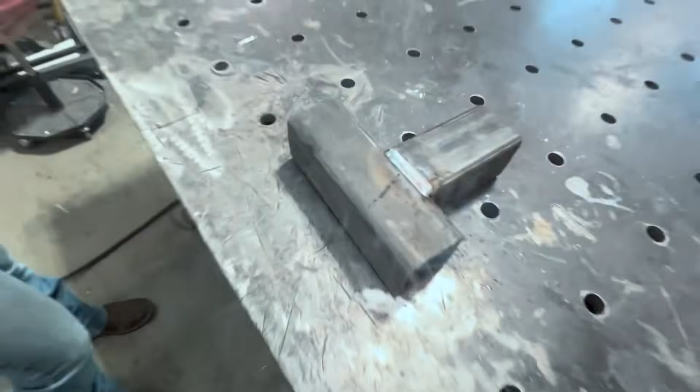Ooh, that's a good fucking weld right there. That's pretty. That is pretty.

Happy Mother's Day to those of you who are sitting on the sofa while your wife is out having brunch or lunch with your kids, getting her nails done, going to a yoga class, you know, all the typical mom stuff.

So this is our Mom and Me Day, and this is my daughter Christine, and she's a welder. Well, I'm a fabricator. No offense to the welders out there, but I'm kind of better - not at welding, but just sticking shit together. Accuracy is my big thing.

She asked me what I wanted to do for Mother's Day, and I said I wanted you to teach me how to weld. Because JF is very eloquent with me - you guys have seen him on camera. Well, I cut all the bad stuff out when I'm in tears. But tears when he yells at me.

You suck at listening. I do, true story. Well, I mean, I feel like I'll give you better analogies. You always get it if there's a good analogy. Yes, you got to compare it to something you can understand.

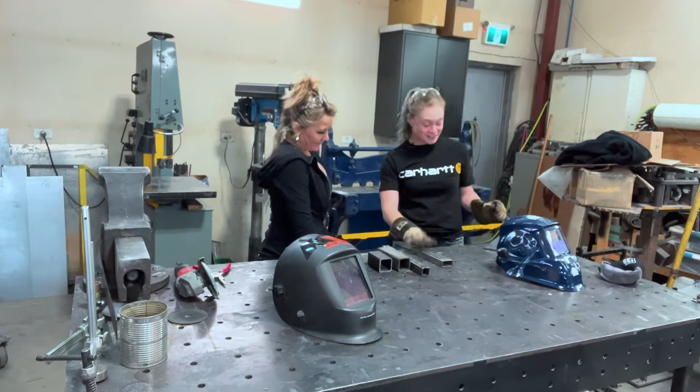What are you going to teach me first? Well, I was going through your scraps. Okay, and steel - just plain steel, stainless, aluminum. That's kind of the basic three. So this is steel, stainless, and aluminum. Yes. Okay, what's this? That's also steel, it's just a fun shape.

So I think there's something I can make with this. If we just add the fourth piece and make like a little 3D diamond, I don't know, something more fun than just a basic shape. Sure, I mean this is what I did when I first started welding - it was just shit like that, and then you get all sorts of different things, and my boss was like, cut it on an angle, stick it together weirdly, and just challenge yourself. If you want to learn, you just put it up like that and try to figure out how you have to weld a gap in something.

I mean, I work with a lot heavier steel than the welders that you guys have, so it does make a big difference. Like I've got goggles, I've got gloves, I've got a welding helmet. Halfway there, I'm safety first. It's more than JF ever does - safety squinting is his forte.

First things first, I'll turn the welders on. Okay, let's talk about welders. We're waiting for our sponsor, by the way. We have Lincoln Welders and we have a Miller welder, and so we're not privy to either right at this moment.

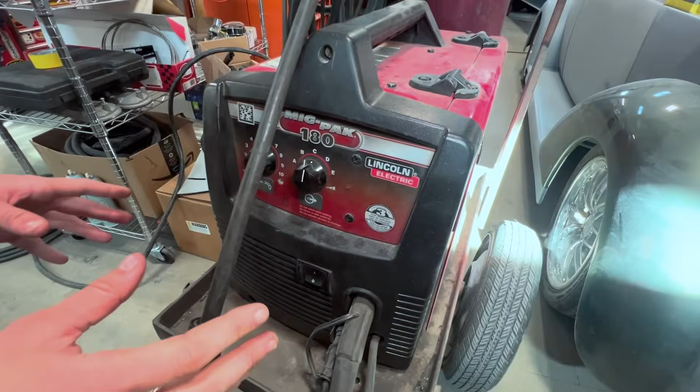Now this is a small welder, and it's a hardwire machine - you're running hardwire. But welding is really just until it feels good, until you lay a weld and you go, yeah, I like that, and then you just stay there.

It's not rocket science. Yeah, because I know JF often, this is where he'll have it set - he'll have it set sometimes on B and sometimes on 5. So is this the heat? That would, what do we got? Yes it is, actually, for this one. Sorry, they're all different. So it's a matter of knowing this is wire speed, and then you've got a turtle and a rabbit.

And then it shows the wire going through the rollers out the tip of the torch. Okay, and that's V for volts.

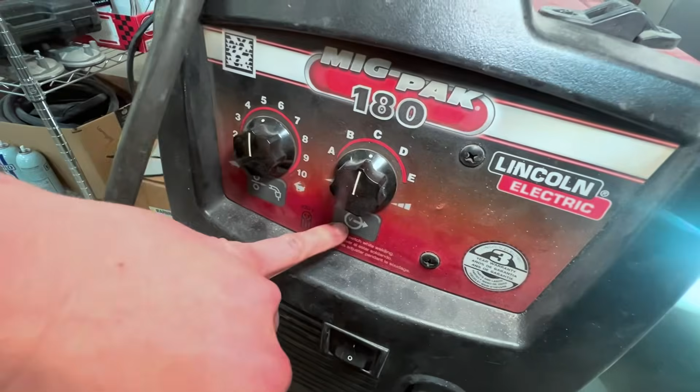So heat is A to E, and speed is 1 to 10. This one will have an actual volt and amp reading. This is super important because it has to touch the metal, because it grounds to it. So think of another metal, like a car battery, you've got your positive and negative terminal.

You think of a car battery, you've got your positive and negative terminal. This is your positive terminal, and that's your negative terminal. Makes sense. There are no stupid questions.

What if you don't have this on, like what if this is just on the floor? Well, take it off the table. Nothing, nada. Okay, so that makes sense.

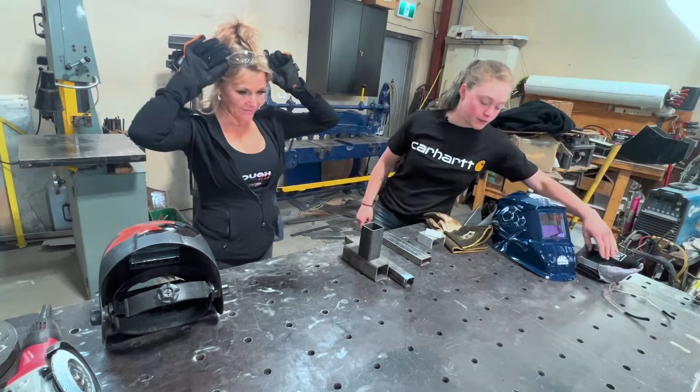Well, let's get welding. All right, you want to weld? Welding helmet, with safety glasses. Okay, JF's got a bigger head than me. So when it's on your head, push and then twist.

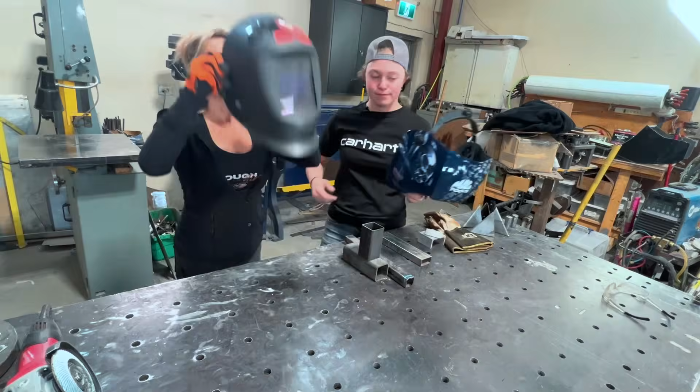Invited Rachel. We should have invited Rachel. This would have been really fun.

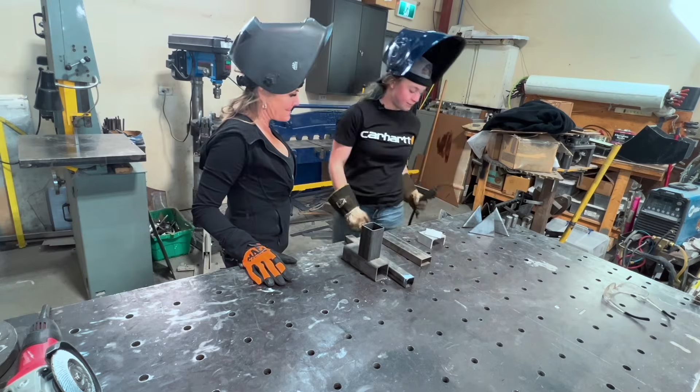Before I blind myself, make sure I'm not in grind mode. Okay. Why am I doing this? I'm supposed to be -- no, I want you to do a weld first. Don't freak me out.

Check them up. We actually do call these guns at work. It's just a gun. It is a gun. Okay, cool.

Can you see okay? May the 4th be with you. Oh wait a minute, what happened? It just went black. Yeah, the lights are kind of bright in here. So it's actually turning the helmets on because they're auto darkening. It'll make sense, just stare at that and then you'll see.

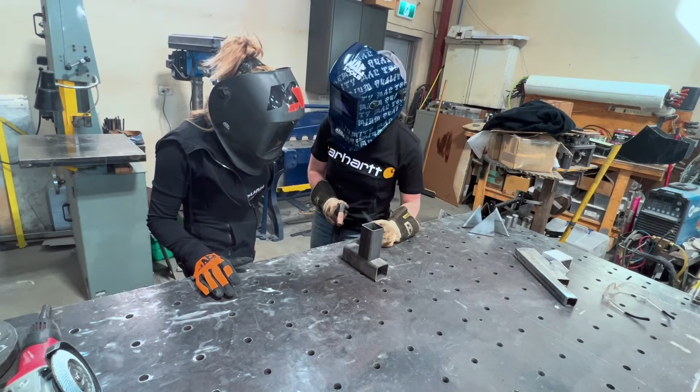Did you see that? Yeah. I gotta go lefty here. She's a little cold. Is that why it pools like that? Makes it a big blob?

Yes and no. I was trying to get it to fill in quite a bit, but you see how it looks like you can stick your fingernail under each edge? You gotta know how to weld badly before you can actually weld nicely. That's the fun part, because you have to know what a bad weld looks like. So is that a bad weld? It's not a good weld. I mean, it's not gonna go anywhere.

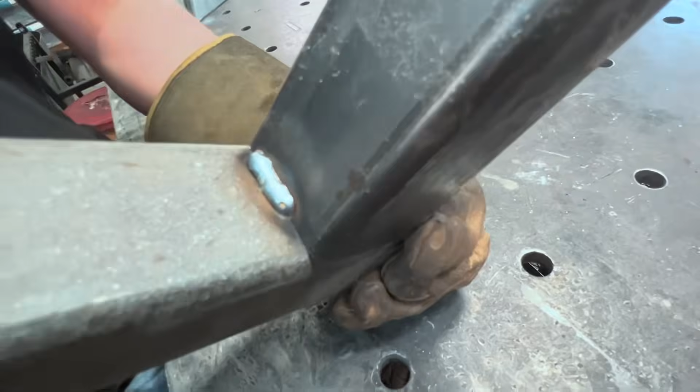But it looks like you could probably grab it almost. Yeah, like it doesn't really look like it's flush with the metal. No, it should be a lot more dipped in, concave. So is that because it's not hot enough? Yeah, okay, that's a cold edge.

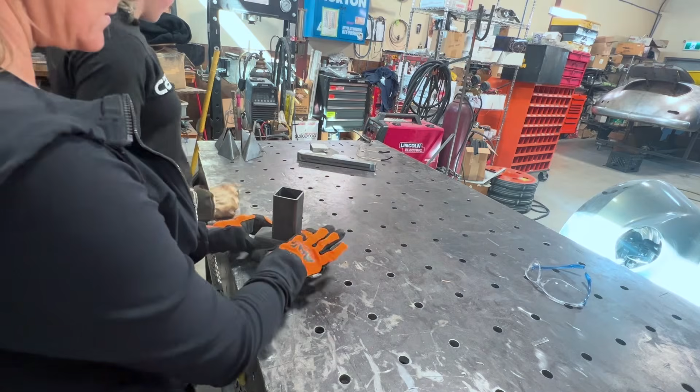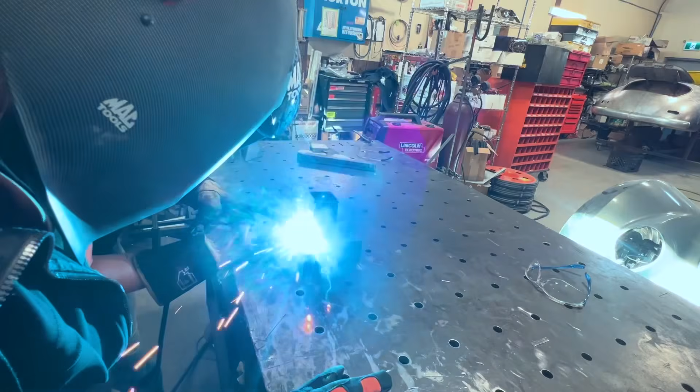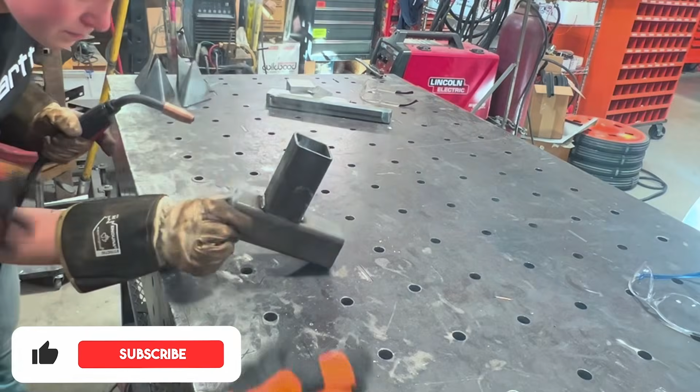Yeah, that's a little better. A little better, not great. Still got a cold edge on the bottom, but it's much better on top. Well, it's pretty nice, a couple little dimes there.

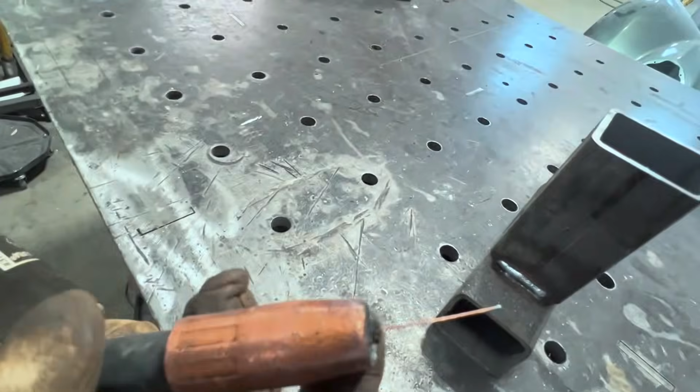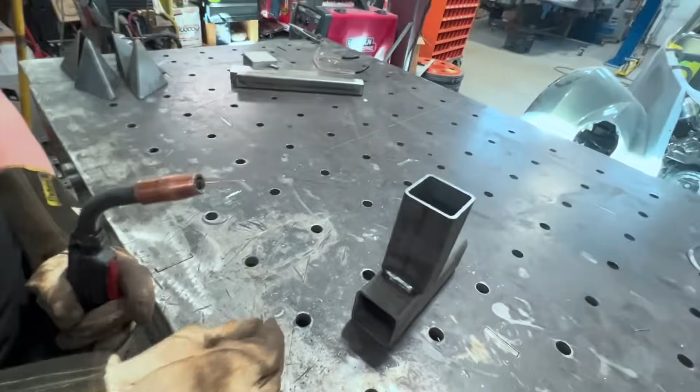So what I was noticing what you're doing -- is it like you do a little circle, circle, circle? Yeah, circle, especially with hardwire, which if the camera will focus on it, you can see how it's coppery looking, the wire. That's hardwire, so it's 100% metal. Whereas the wire that I would use at work is filled with a bunch of little powder and chunks of metal. Oh okay. So it's called metal core, but it's actually hollow on the inside.

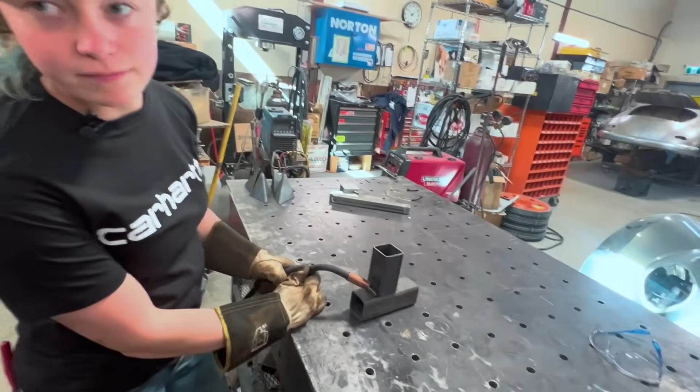We use a different gas as well, and it's a lot bigger than that wire. So when I'm using hardwire, I do little circles, kind of like if you've ever seen guys stick weld, they do the same thing, but with MIG you want to push the puddle, and with stick you want to drag the puddle. So anything wire fed, you push the puddle.

And with stick, you know how there's that coating around the electrodes? That's called flux, and what it creates is slag. So you see guys chipping their weld after it's done, that's the slag. So if there's slag, you drag, and otherwise you push the puddle because it works a lot better. I'm trying to do this almost backwards so you can see a little better. There's a little bit of a gap there, so we'll see how it happens. Gaps happen, gaps happen.

Woo! There it is. That's a good fucking weld right there. That's pretty. You did it. Wow, I get paid to do this. It's fucking awesome.

Sorry, my daughter swears a lot. I work with 50-year-old men all day.

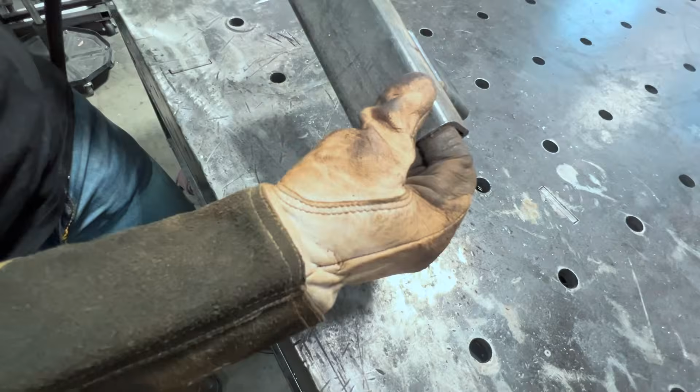And that's pretty flat as well, pretty much spot on as it should be. So there was no circular movement? No, just going forwards and back and forth, over-exaggerated, because I wanted to bring the material from this piece into the weld, and do the same with this one. I wanted to fuse the metals together, right? You're adding a little filler material, but you want both pieces to merge. You want two to become one. Gotcha. It's just I glue the metal.

Okay, your turn. Oh God. That's it, that's all you get. I literally can't show you any better. You just have to try. There is no do, only try. Or no, there is no try, only do. Only the Sith deal in absolutes.

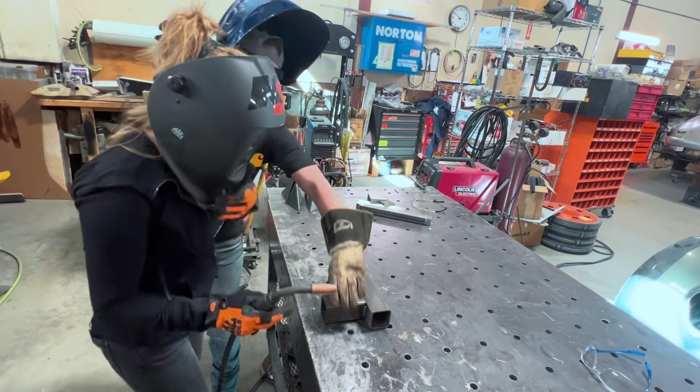Okay, whoa, stop. You see how much this is out? Oh, that's not good. You press the button. So what button am I supposed to press? The big red one. But don't do that until you're ready to actually weld.

And do I go this way or do I go this way? That's my question. Well, look at the angle of your head. If you're angling this way, you want to push it. Because you're holding it in your right hand, it's going to be easier for you to do it this way. Do you want to move over there a little bit more? So where are you starting at? If you're going that way, yeah, right? That makes more sense to me, going this way.

Okay, oh gee, I don't have my helmet on, woman. Flashbang. Okay, it's stuck. Yes, just hit the button again.

Holy fuck, where the fuck are you going? This is throwing everywhere. Okay, it scared me. I noticed. Okay, but that wasn't bad, it went into there. The welder's set really nicely for this material now too. But let me finish that, even though there's that little block there.

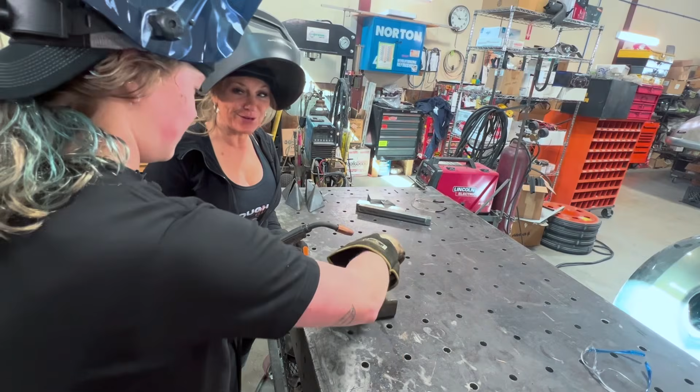How many hands are you using? One. Use two. Why are you using one? I don't know. Make a tripod out of yourself. One, two, three, right? Like you can lean on this, not as much, but our nozzles are like this big around. Some of my gloves, because they're so hot, they're like constant Lego hands from grabbing nozzles. But usually on big pieces like this... you know my mind, as soon as you said Lego, I was like, everything is awesome.

But you can literally just rest this on the bottom piece. That's what I normally do for welds like this one. As this one goes along, I'm resting on this material. I was a little nervous, I gotta say. The only thing that's ever in my hand when welding's going on is the camera. That's fair. Well, we can change that.

Okay, so let's try this again. Right hand, have one of your hands like here. This can get warm after a while, but if you have your hands like this, you have way more stability. Okay. Eyes. Okay, yep.

I have no idea if I did anything, you're kind of blind in there, aren't you? Totally blind. You were following the edge of this material. Did not, I didn't even. You barely touched this. It's hard to see, and it's really hard to explain.

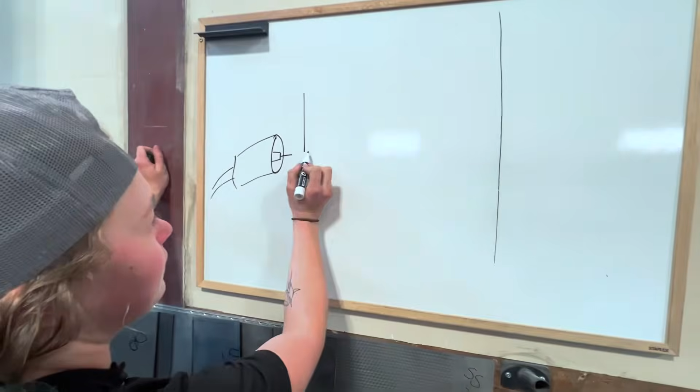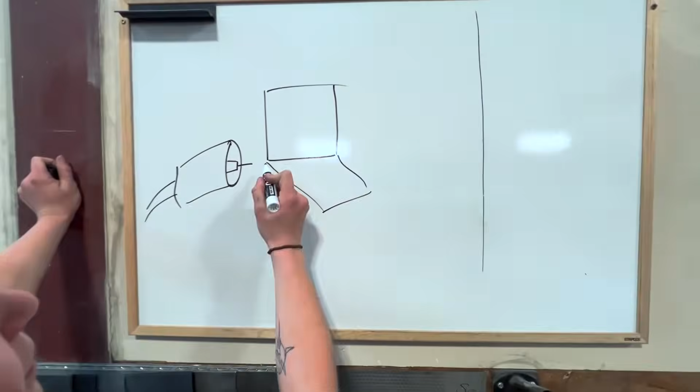So here's your wire, right? This is your little welder, that's what you're holding. And then you've got your piece of material. You're gonna be welding in this corner, right? What you're gonna see is basically a shape come out like this - that's the arc. And then all of a sudden your puddle is gonna be here.

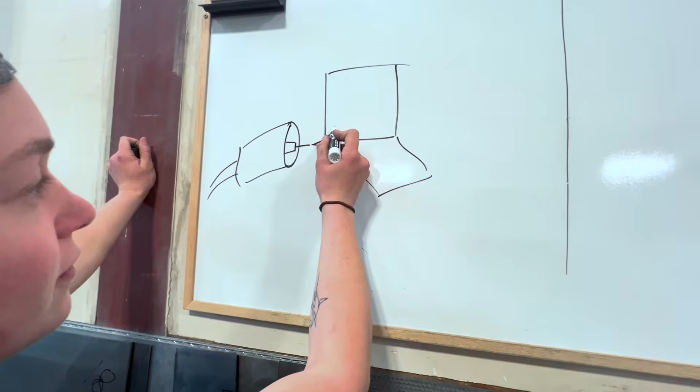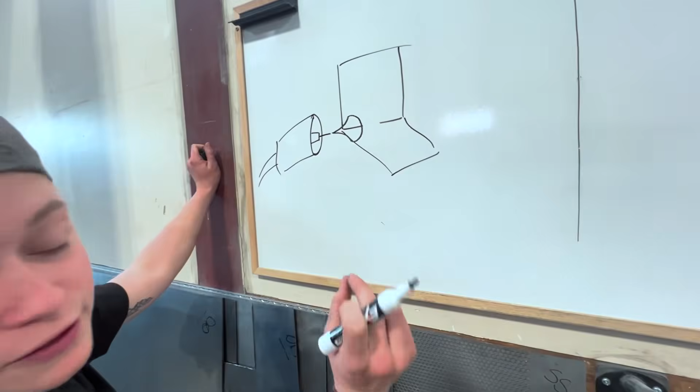For me, I didn't see anything puddling, and that's because you were going too fast. That's why your weld was small, whereas my weld was that big.

I was in a hurry. I'm always in a hurry. Okay, you don't need to be. So this is going to be your arc that comes down, you'll have a puddle forming, and then what you're also going to see is almost a little triangle like that.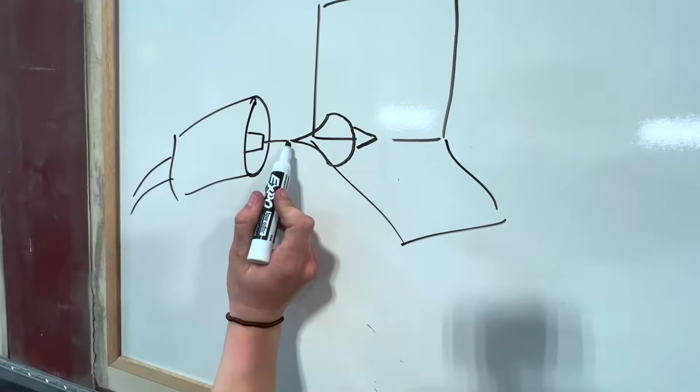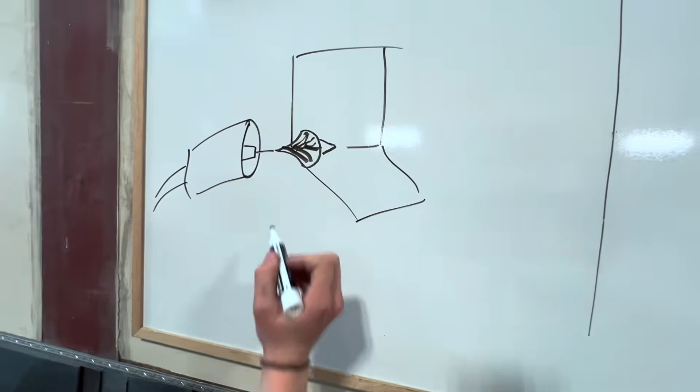Anyway, that's your wire that's coming out, and then it goes out, and it's gonna blah blah blah, and then it puddles. And after the puddle, you'll see this little bit of gas. He's very excited, he's so excited right now, he's prematurely excited.

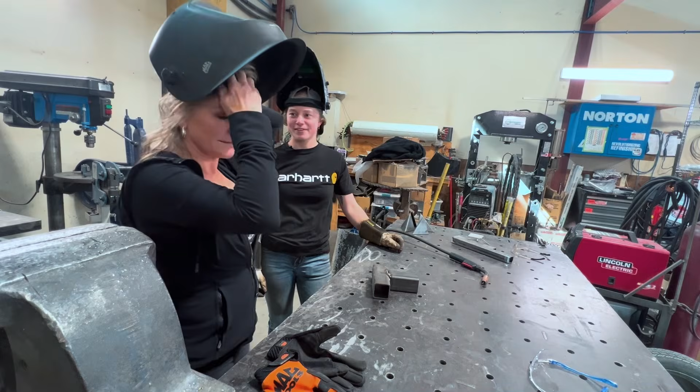It's a smiley face. Do you have a hair tie you could just ponytail it with? You good there, Fabio? My child likes to mock me a lot. I am my target audience - if it's funny to me, that's all I need. That's it, you're your own audience? I am my own target audience.

We're gonna give you a long surface to use.

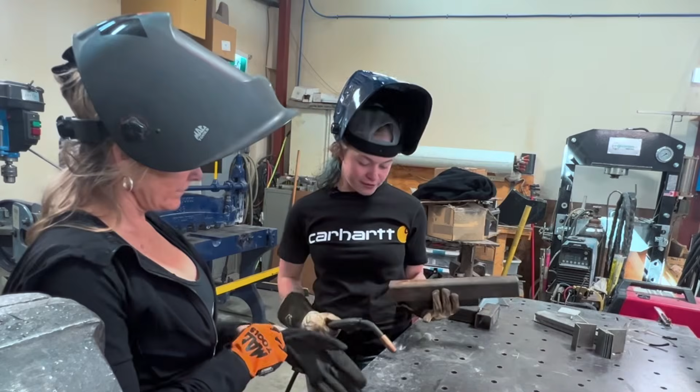Why does it stick to the... so see that? That's where it's sticking. That's what happens when your surface isn't clean a lot of times, so you can see it there. As you weld, there's all those little bits of spatter that come off that burn you on the arm. That doesn't feel so good anywhere. Those little pieces, if they're on the table and get underneath the piece, they arc out, that's what it's called, and that's why it sticks, because they kind of just explode basically.

Okay, so I'm going to go from this side and push it along. So just before I do anything - oh, that's what those are for, this is a fab table. Yeah, I know this is a fab table because I know Gary works on it all the time.

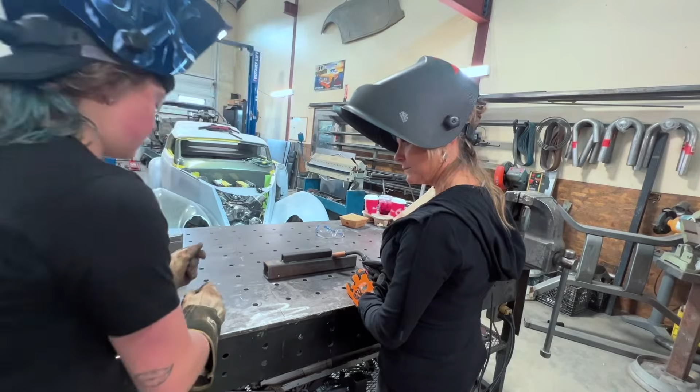So I just go like this, and there's no rush - I'm just practicing. You gotta try, it's so hard because I'll be able to see a little bit better from this side now. I think that'll be okay. I'll be able to watch and can even just say slow down, speed up, whatever, because I'll be able to see the puddle better than you can, since you still don't know what you're looking for.

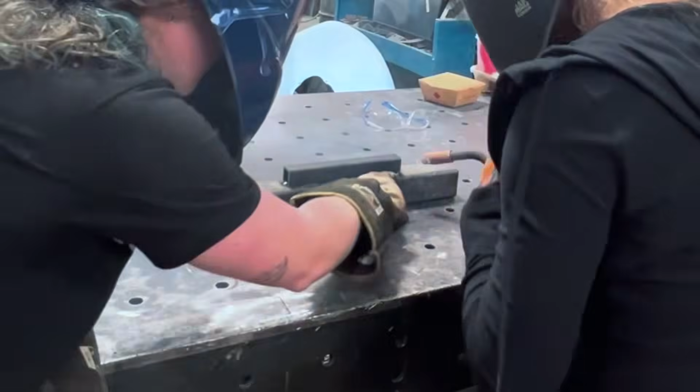So you're too low again. Pardon? You're not in the corner. Ah, okay, you see that? That metal should be directly in that corner. That's where you want to be.

That distance, don't keep pushing in. If it helps, you should be able to feel how you're resting the bottom of the nozzle on this corner. You can just stay there and rest it the whole way along. If you want to move it a little bit, you can still manipulate the direction a little bit, like that.

Everybody, find what you like. Not everybody does the same thing. I never weld the same way, ever. Sometimes I do a big whip where I go forwards and then come back, two steps forward, one step back, you know, like the song. Sometimes I go like this and work my way across. Sometimes I just do dimes. Sometimes I go like this. It just depends, depends how I'm feeling.

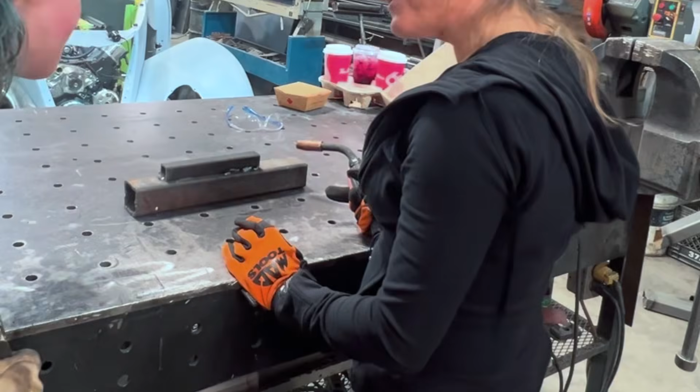I don't know, I can't see anything. That looks horrible. Didn't know there were birds in here. It does look like bird poop, it's awful.

I'll come from this side. Maybe I need to go this way because I could do it left-handed. Well, it's important to be able to do both when you actually do this as a job. Maybe going this way just doesn't work for you. Maybe you can go in this hand and go that way still. It's dealer's choice, but I need to be able to see.

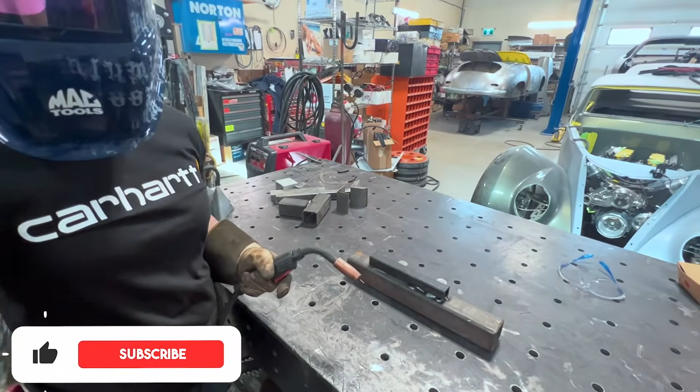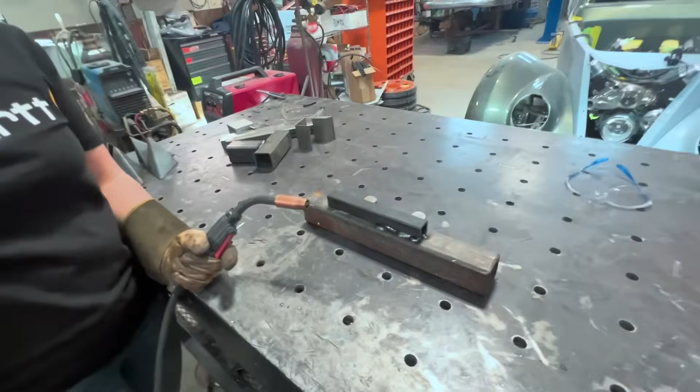Maybe if you zoom in through the camera, I don't know. I'm trying to figure out a way that I can show you what you should be looking for. It's so hard. Okay, you should have your helmet on for this though.

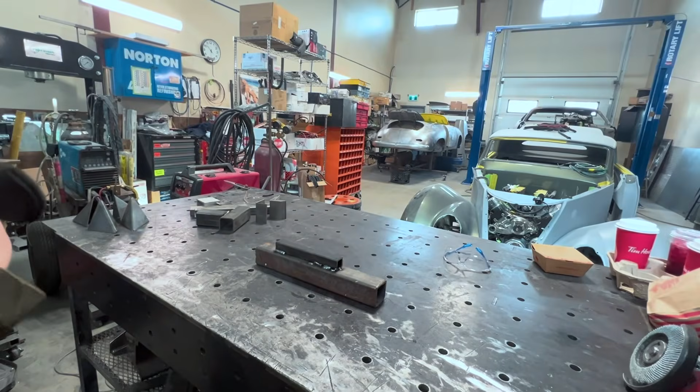One thing I just learned that I was doing wrong was I was trying to keep my face on this side of it, and I actually wasn't even seeing. You need to, yeah, that's why you weren't seeing. My face was on this side of the thing so I could see what you were doing, which I wasn't before. You have to be able to look at it, it's very, very important. So that was helpful.

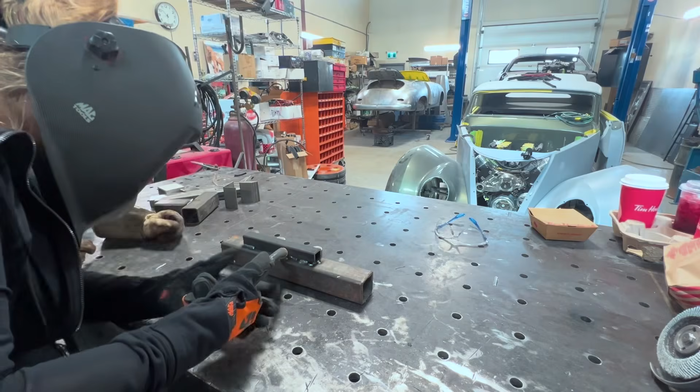Okay, so let me try again. Put your body on the side to where you're welding, right? So if I'm on this side, I can see what I'm doing. Yeah, you're going to see a lot. I bet it's going to blow your mind.

You're going way too fast though, easy there. All right, let's take a look. Well, so you tell me what you did wrong. I'm going too fast. Yeah, you're not letting the wire fill at all.

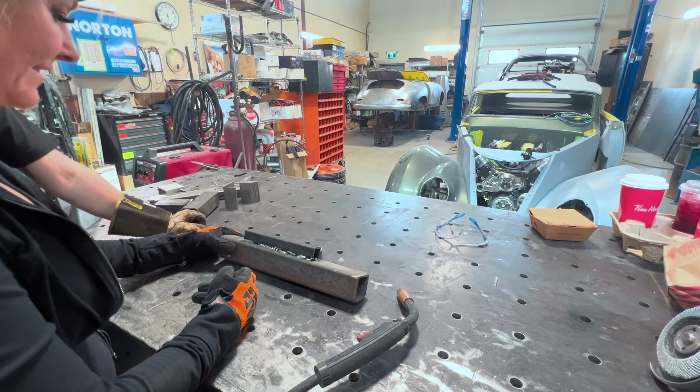There is a lot of patience required in this. I've spent 20 minutes on a single weld. Well, the weld was 10 feet long. Yeah, but like 20 minutes to do the whole thing. So you know what, this is so good for me because JF is constantly saying slow down. And I said my mantra needs to be slow down. Yeah, you gotta just pump the brakes, chill pill.

I'm gonna, can I turn it around now? Yes. Or should I stay with my bird poop? No, just turn it around, you want more clean.

So I'm going to go from here to here. Roughly in your mind you kind of know how far of a wrist turn or something like that. One of the guys I work with counts, and I sometimes do it too when I need to keep a really nice steady pace on something. Counting to a beat, that's why music is so nice to have in a shop, because you can keep a beat really, really nicely. So maybe counting or whatever you need to do. Okay, I'm going to try that and see if that works.

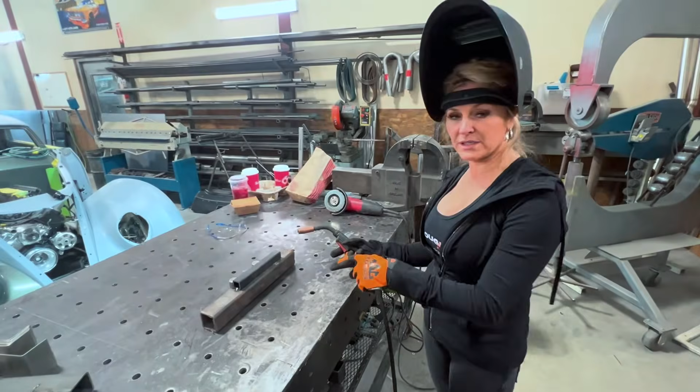When you do this, I'm going to teach you. When you're doing this, you can look in the camera to watch, but you can't watch without your safety glasses on. When you're watching through the camera, it doesn't hurt your eyes. You know I know that, right?

Have you never seen a welding video online? Of course it doesn't hurt your eyes through the camera. What? It was just a blonde thing.

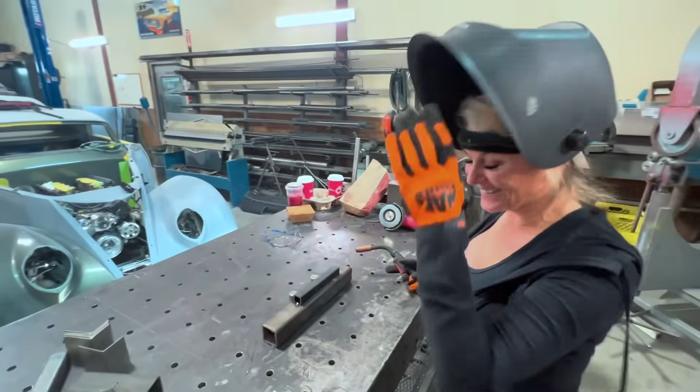Ouch. That's why it looks like I have track marks. You're too close again. Good. How did I get too close? All right, you deal with it. Still got bird poop.

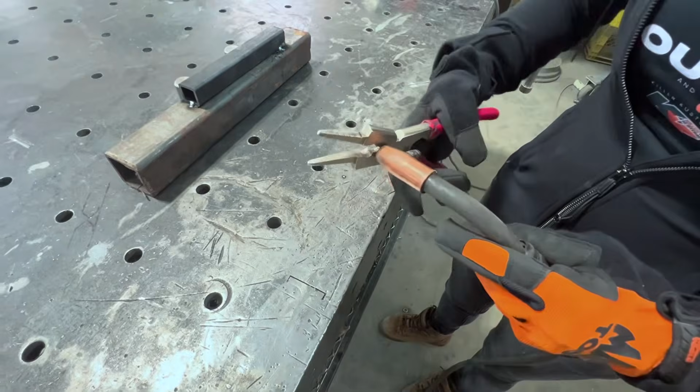Nice, okay, all right let's give a look at the weld there. Isn't that awful? No, it's good. It's terrible, okay, I'm gonna work at this.

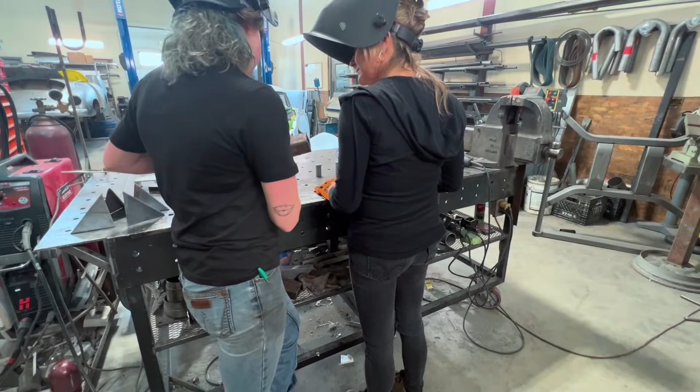You're not in the corner again. Okay, so how the hell do I get in that corner? Okay, good speed there. Consistency is good. You can always tell your speed by the distance between each little loop.

Yeah, you just can't find the corner. No, I can't see anything. I feel like I'm driving blind. Okay, so the thing with these corners, they're radiused, right? So there's a bigger gap there, which I thought would be generally easier. But it might be.

However, let's give you a straight up 90 degree. Okay, and see how that does. This is a little thinner than I want, just for the settings on the welder.

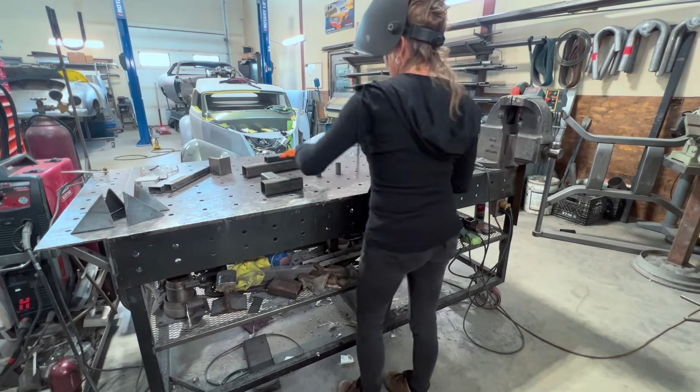Well, while you're doing that, I'm gonna keep practicing. I'm gonna practice on this. All right.

Still couldn't find it for the life of me. Actually, do you notice how you're on either side of it? Yeah, slow the fuck down. Do you see how tiny that wire is? Do you see the size of the crack you're trying to fill? You gotta ease up.

You were perfect, you were right where you should be. I kept my helmet off because I could actually see your movements better. And you're right there, going around the corner perfectly. But you were fast, and you're making big loops too. Make them smaller. See if maybe that helps slow you down. Don't try to do them so over exaggerated, I guess.

Better, almost too slow. Speed up, speed up, slow down, speed up, slow down. Okay.

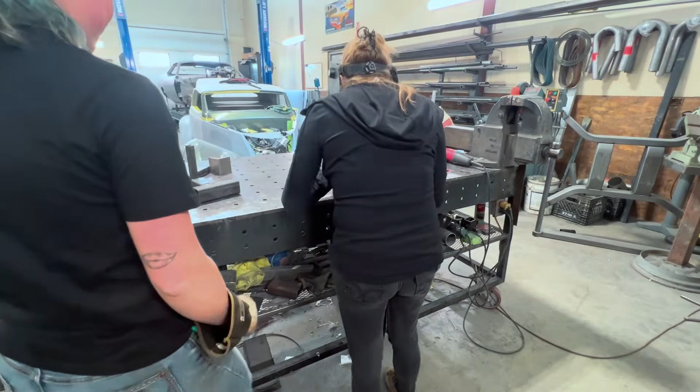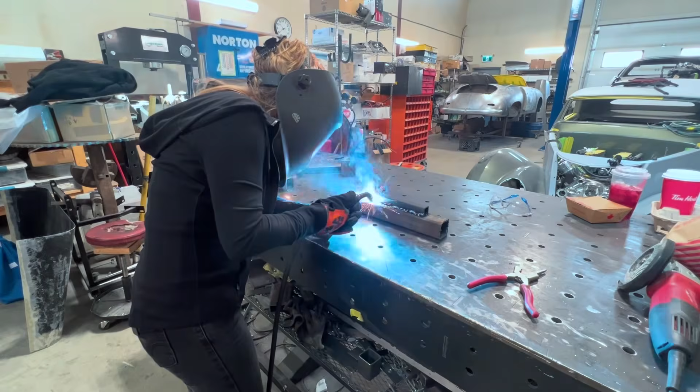You're just getting my back. Oh, I am. Well, that was good. That was very good. I thought you just moved over. Well, it's a blob.

What if I were to just try to weld here, instead of just trying to weld on something together? What happens there? Put a couple welds that way. It's what we do to set our welders up so we know if we're running right.

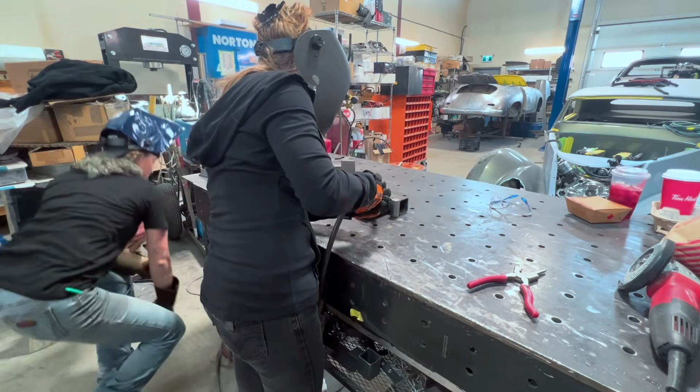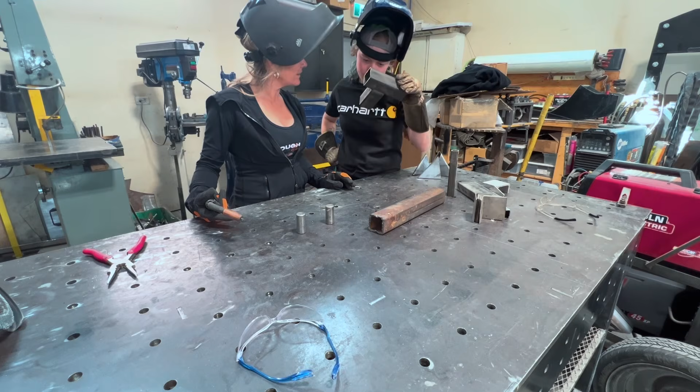Well, that I seem to do okay. There's no corner to fill. It's difficult, I have gained respect for the welder and the fabricator. I mean, yeah, it's good, it's not bad. You just can't seem to fill a corner.

Let's practice on something else. Okay, what do you want? Here we go. I feel like that's an easier spot for me. No? Sure, just do it where you want.

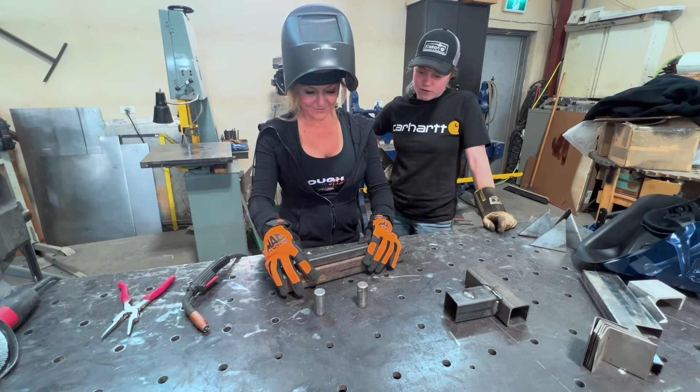Actually, that just gave me an idea. Since you like the flat welding.

Squeezy. Bitch. I'm reaching down my pants. That's where they normally are.

What did I do? Did I do that? I might have messed up the tip.

Uh-oh, you won't get it with snips, unfortunately. Also, this is where your gas comes out, this is called the diffuser. This is your contact tip, it's called. That's your nozzle.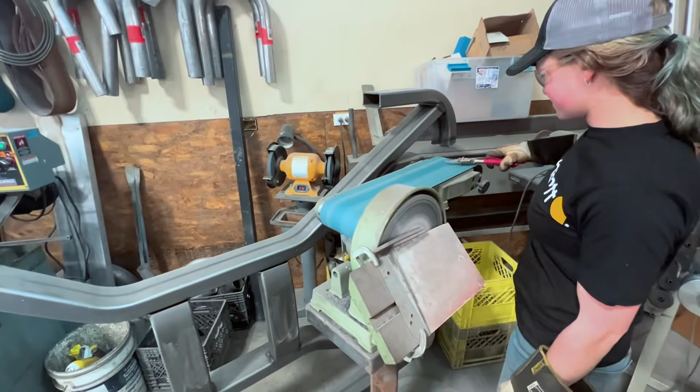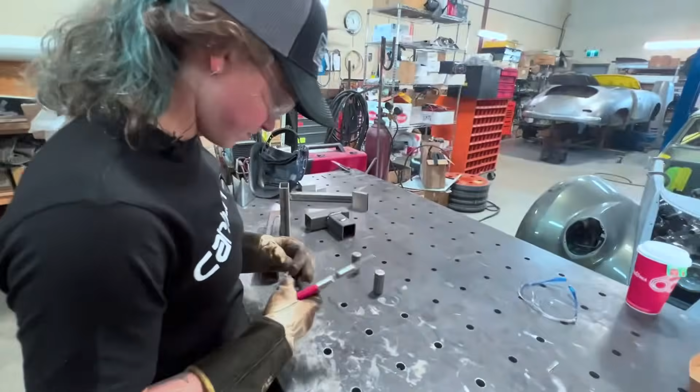Maybe, maybe. Yay! Ta-da! Yay. A tip cleaner would be good, but I'm sure it will be alright. Maybe not.

That's like threading the eye of a needle. Except the hole's only that big anyways, so that's why I mentioned it. Tip cleaner, does that really matter? Come on.

Don't be that way, just don't do that. Aha, got it. Threads on this are a little messed up. Technical difficulties, folks. Ta-da! Okay, no longer foobarred.

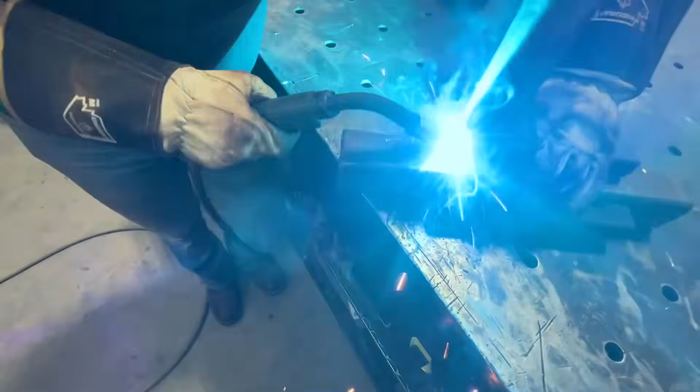Because then, after you try again on this side, then I can try that side. You can try to do this. Okay, it's more flat, but very open.

Fuck! Erase that. The people can't know, can't know I laid bad tacks.

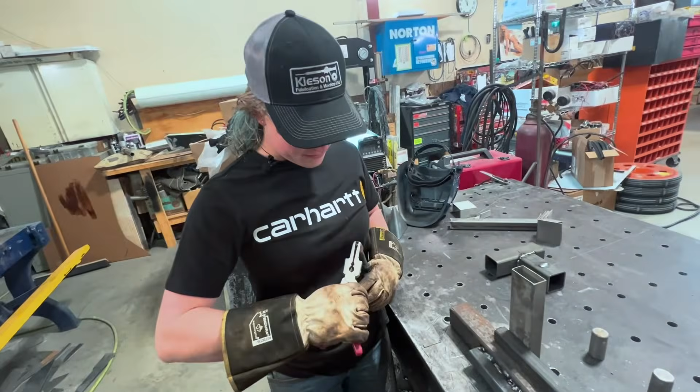Words I'm not gonna say on a camera. It happened again? Yeah, it's probably my bad. It wasn't in my hand. Hearing a lot of judgment coming from you.

If you've noticed, the tip kind of sticks past the nozzle. Yeah, it shouldn't. Oh, is that right? Well, that's good to know. Because then it happens a lot, you can constantly accidentally stick the tip in the puddle. Oh, I think I was doing that all the time. You were.

Hey, whoa, easy. Okay, so. What do I get to do first? That side? Yeah. And then, I mean, yeah, do that side, and you can. Oh, I gotta retack that.

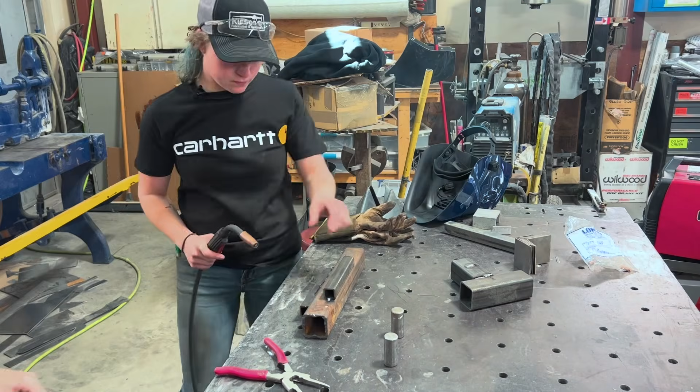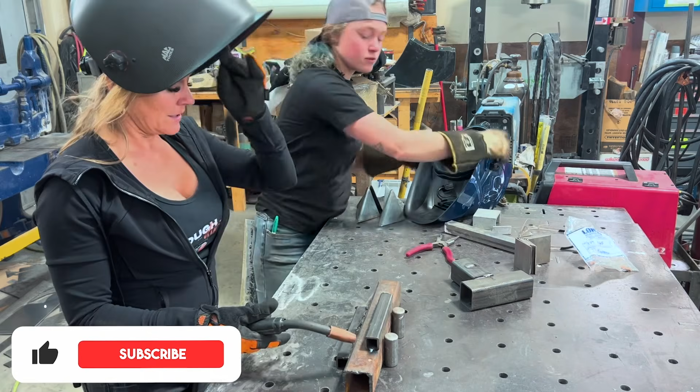Pull this back over. Okay, and now over here. And even slower than I was going before. Let it pool, push. Let it pool, push. Yeah. Let it pool, push. Let it push. Okay, let's see what happens.

Scare you? Didn't have it at the beginning, but I got it. That's good, that's really mucho good, bueno. High five. Yes, oh wow.

Yeah, that looks great. Okay, keep doing it. Do it again, like 3 times, 5 times. Keep going, we're rocking it now.

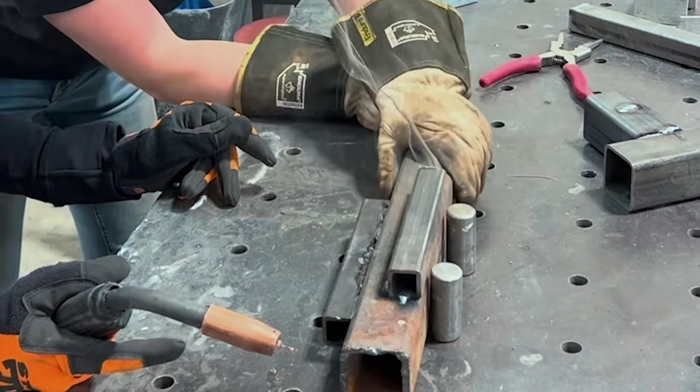It's a good looking weld, it's just not in the corner. I need to come down. You're just having a hard time seeing, huh? I do, my eyes are bad. Okay, but that looks good, fantastic though. That's really good. Well thanks, just between the two pieces though. Do that in the corner, and then that's pretty much it. Okay, let's try again.

Too high. Too high. When you stop, don't... oh never mind. Well you said stop. I said when you stop, okay, because you weren't supposed to move. That wasn't bad.

Go like you're about to weld, but don't pull the trigger. Yeah, see, your angle's good. I'm trying to figure out why you're having a hard time seeing, and I know it's hard on the eyes.

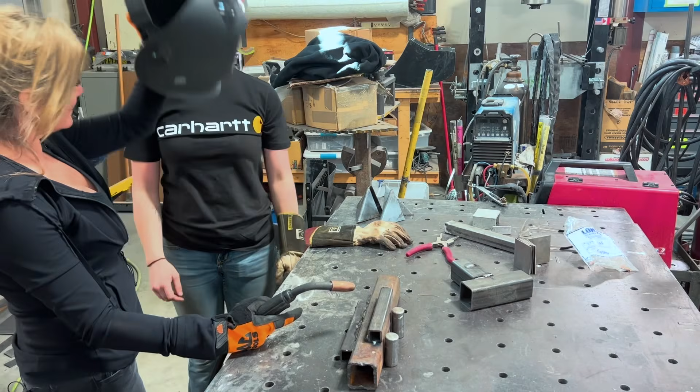Take your helmet off, I don't want to pull a bunch of hairs. Shade 9, no fucking wonder. Apparently, what does that mean? Now try it, I bet you're gonna go 'oh my god, I can see.' I look like I'm in it, it's completely black. Well, it's gonna be darker. I keep my helmet somewhere between 11 and 12 for darkness, and it is so much easier to see, in my opinion.

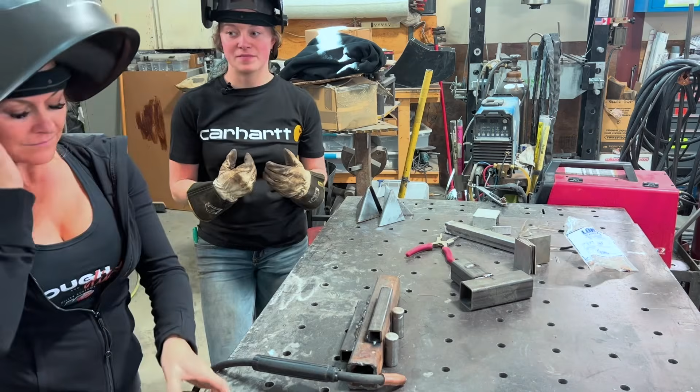A lot of people think that the lower, like a shade 9, or 5 is the minimum for it to not be super harmful to your eyes to see a weld. When MIG welding, like TIG welding and stick welding are the brightest, so depending on the process it changes. You can see it on the ceiling of a welding shop, sometimes it's green over there, blue over there, and white in some other bay. I like shade 11 to 12, mine's a dial, that's my shade adjustment. I like it pretty dark, you can see a lot better. Well, in my opinion, so maybe it'll work for you.

I don't know why you stopped that first time, because you were killing it. Don't second guess yourself so much. Well, I take that back. Yeah, look at that, I see that, that's perfect, pretty much perfect. And then you thought it was bad, and then you made it bad. Okay.

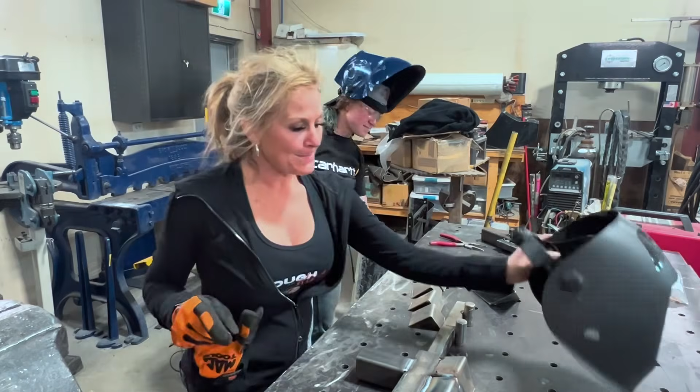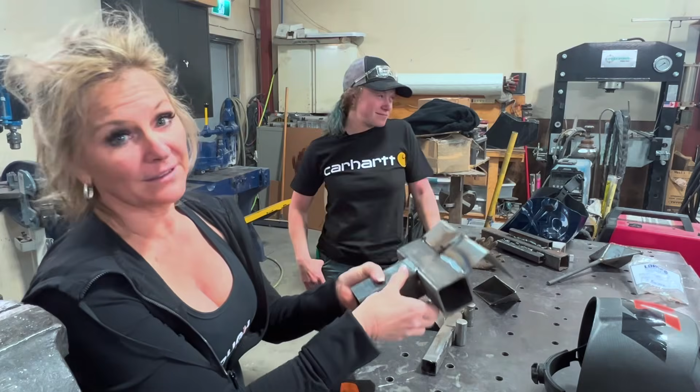I think I learned a lot today. Thank you, you feel good about it? Yeah, I do. Was a lot of stuff to do, I was crappy at the beginning for sure. You should be, yes, technically. Yeah, you know, and I feel good though, because if you guys look, this is Christine's, and then this is mine after a couple of hours and a lot of work. My hair's all a scattered mess.